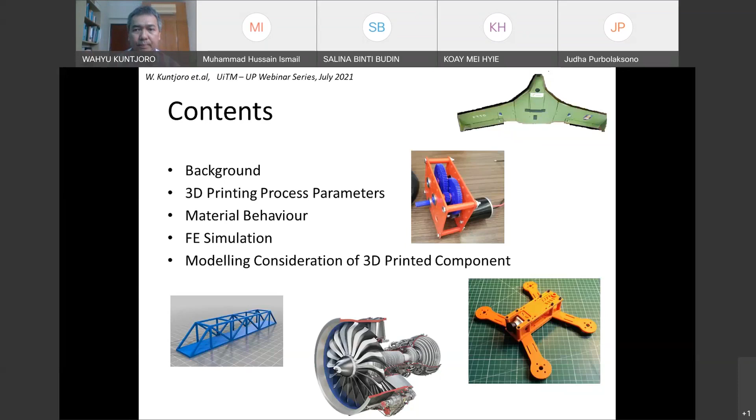Okay, so our background is aerospace engineering. FTTC does aeronautical and aerospace engineering, meaning mostly what we do is airplanes, drones, or multi-rotors. In this case, we are going to focus more on the fixed wing, because that's what we mainly use this 3D printing for. If we look at this picture on the right here, that was around 10 years ago when we built an airplane with a 5-meter wingspan.

The unique thing is that this airplane was powered by a fuel cell. The problem is, at that time, the power to weight ratio of this fuel cell was very poor. Meaning we don't have much power and the fuel cell is heavy. That means we need to generate enough lift or vertical force upward so that the airplane can fly, but of course the airplane has to be lightweight.

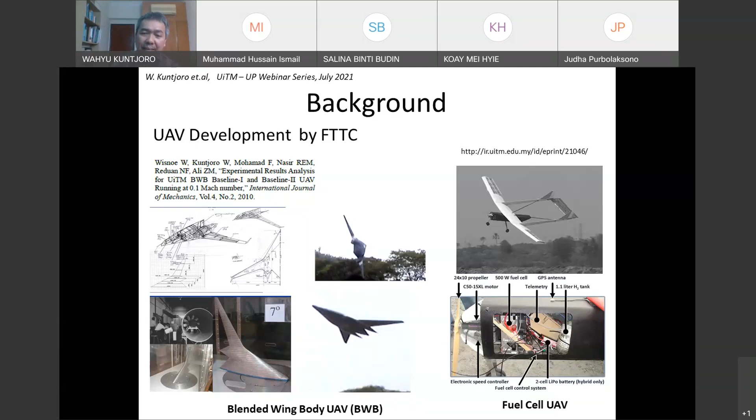For comparison, when we design and build a small airplane like this, meaning the wingspan is less than 1.5 meters, I'd say this comes under the category of micro, or small mini UAV, then it is simple. This is made of balsa, a very conventional airplane, easy to design, easy to build, easy to calculate. So just for comparison, balsa is okay for this kind of airplane.

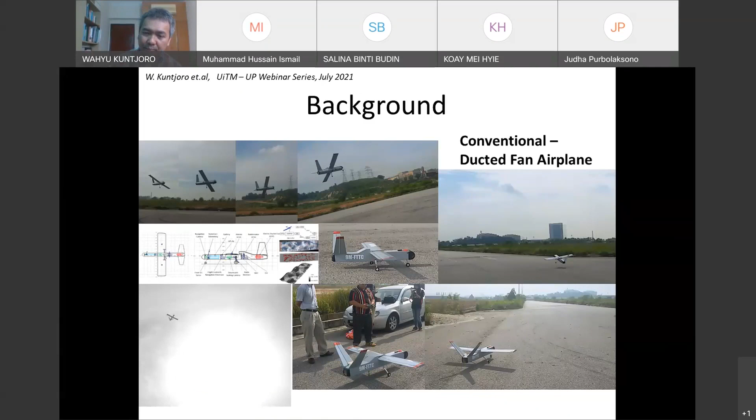Okay, so now this is another story. This is, I think, around 8 or 9 years ago. Everybody in Malaysia is definitely going to be familiar with PRGS, so this is making use of a PRGS grant. We built the prototype of a blended wing body airplane, tailless without tail, and with canard. We wanted to manipulate the flight dynamics and control by using the canard. That was the intention at that time.

Mind you, this is 8 years ago. So we built this airplane, and the problem again is how are we going to build it. This airplane is about 2.5 meter wingspan, meaning the length from wingtip on the left to wingtip on the right is about 2.5 meters. Why didn't we want to use balsa? Because this is a prototype, and it will take a lot of punishment. Definitely it would fall down, incidents happened, and indeed that happened. So we need a frame that is robust and can take punishment. Balsa couldn't do that.

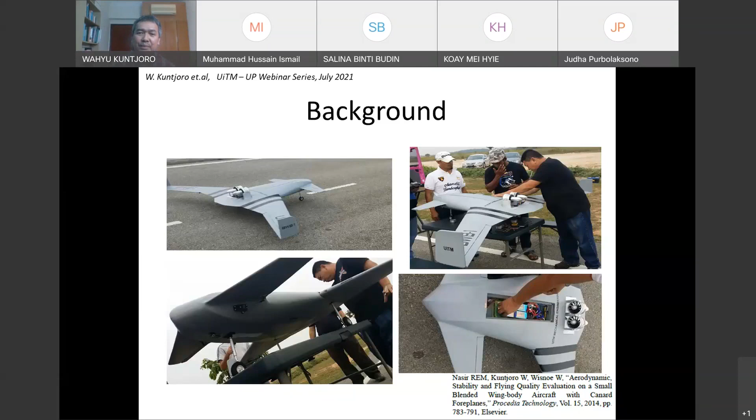So again, we have the challenge: how are we going to build the prototype to our design, which is going to be okay, but not so expensive? By the way, we did a lot of manipulation to our blended wing body.

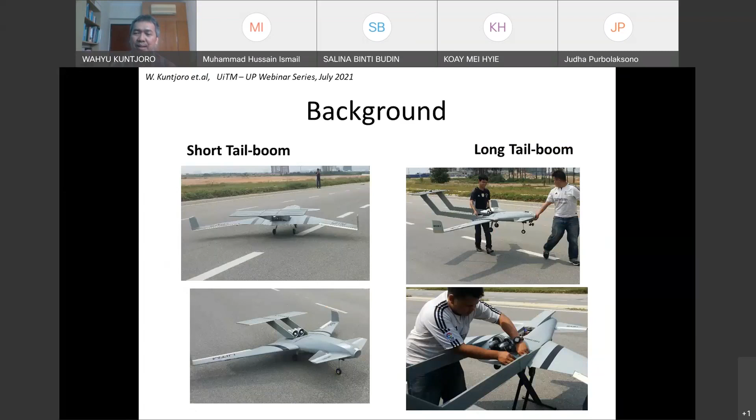Probably it's not so clear to you just by looking at this picture, but only the body and the wing are made of composite. When we add additional components such as the horizontal tail or the tail boom - this long beam is the tail boom, this is a short tail boom - it is made of balsa in combination with a carbon rod. So this is a kind of mixture of various manufacturing processes.

It was flying a long time ago. So from here we could see that we were evolving in terms of material that we can use for micro or small mini UAVs.

Meaning that it is going to be below 1 meter, 1.2 meter, 1.5 meter, probably not more than that, then balsa is okay because relatively it is going to be robust for that size. But when we go beyond that, like 2.5 meter, 3 meter, or beyond, balsa is not going to be effective anymore. So that is also part of the reason why we make use of carbon fiber reinforced plastic.

So we start with wood, balsa, and then we use carbon fiber, which is expensive, as I mentioned before. By the way, it is not easy to get carbon fiber prepreg which is up to the standard for this purpose. So again, the challenge is it's expensive and we need strength and stiffness. Also manufacturing cost is expensive. So it's always going to be a balance between cost and strength.

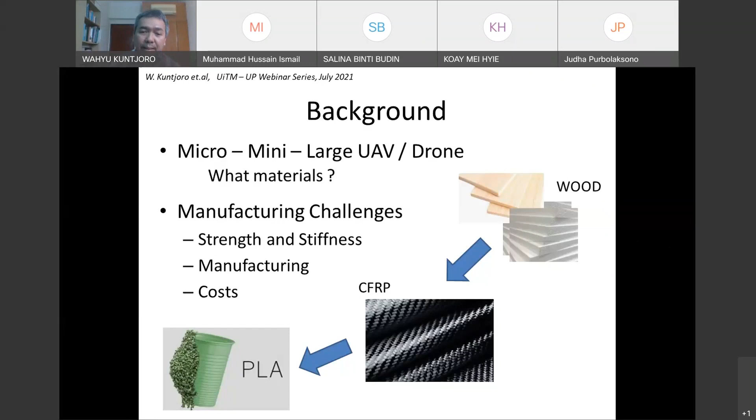That's the reason why, beginning from 3 years ago, we began to look at 3D printing. The material that we are working with in our 3D printing is PLA, polylactic acid, not for any special reason, but because this is easy to get. It is easy to get, relatively cheap, and not too bad basically.

So what you see here, I think this picture is about 2 years ago, a few small UAVs that we built using 3D printing. By the way, this gentleman standing there is the head of FTTC, Dr. Rizal Effendi. He's holding an airplane that is made of 3D printing, and all these airplanes that you see there are made of 3D printing.

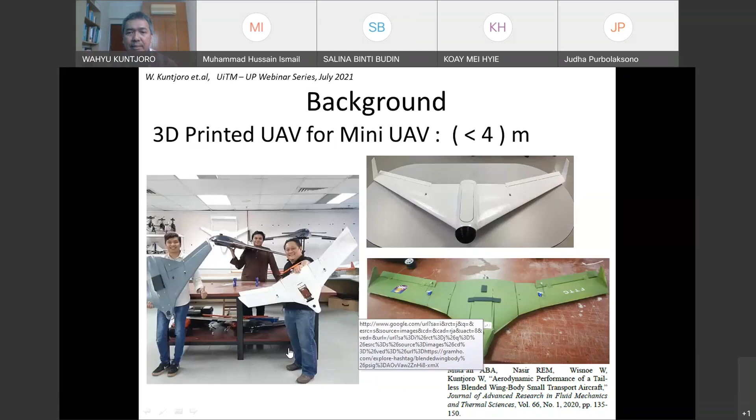And we like it because it can produce complicated shapes, which we need, especially when we are dealing with an airplane such as this blended wing body airplane. Okay, so those are the backgrounds. So now let's look at the 3D printer itself.

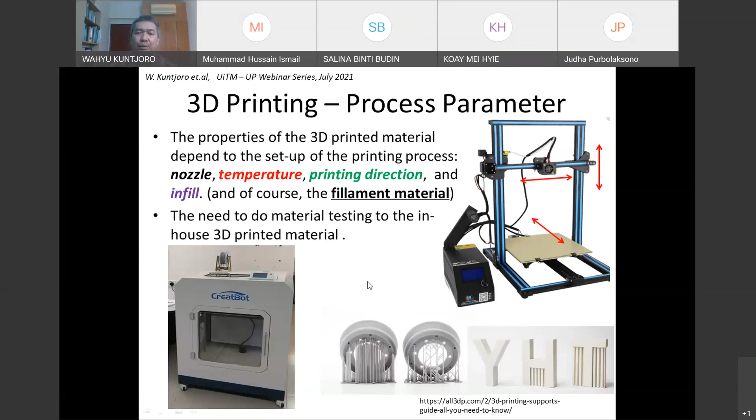We cannot just simply go to a website or look at a journal or articles for the mechanical properties of the printed component. No, because the range is too big and it's not going to be the same. So we need to do material testing on the in-house 3D printed material.

So this here is what we mentioned as infill. If it is 100% solid, that's what you have over there. But if it's 10% infill, that's what you have inside. 30% is more dense, 70% is even denser, and 100%, theoretically, is fully solid. So that is the difference between infill.

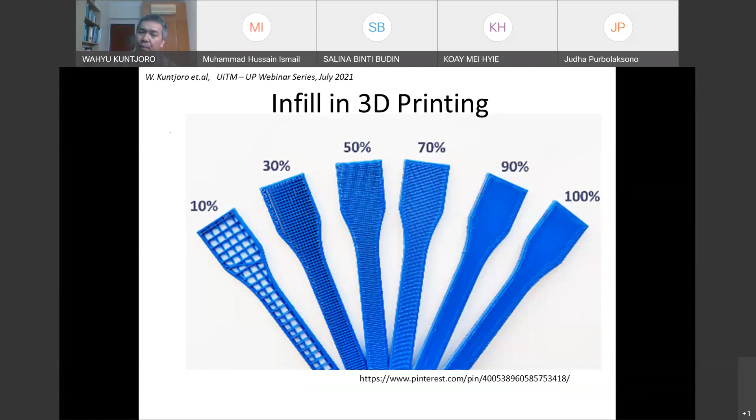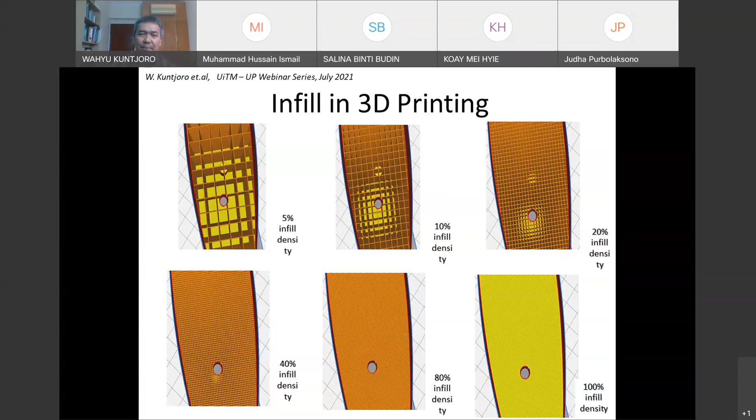We have to take this into account when doing analysis. Here we have different infill from 5% to 100% infill density for the same infill pattern. So actually, when we have 3D printing, inside it is not solid - even a thin plate inside is not solid. And there's also various possibility of patterns, infill patterns, with the same infill percentage.

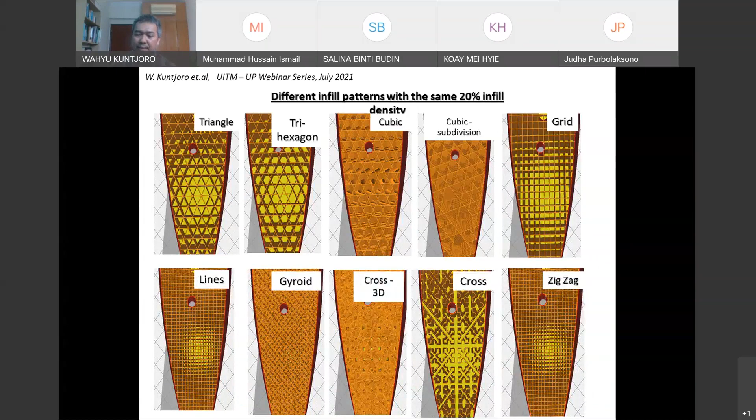So what we have here is an article from Caminero. Here we see the different tensile behavior when we print in a different approach, whether we print transverse vertically, or longitudinally flat, or longitudinally on edge. If you look at these three, the stress strain diagrams are not the same - that depends on the way the printing direction was conducted.

Here it's not more than 40 megapascal. But when we have on-edge printing, it comes to 70 megapascal, almost twice. That means we have to be careful with this situation.

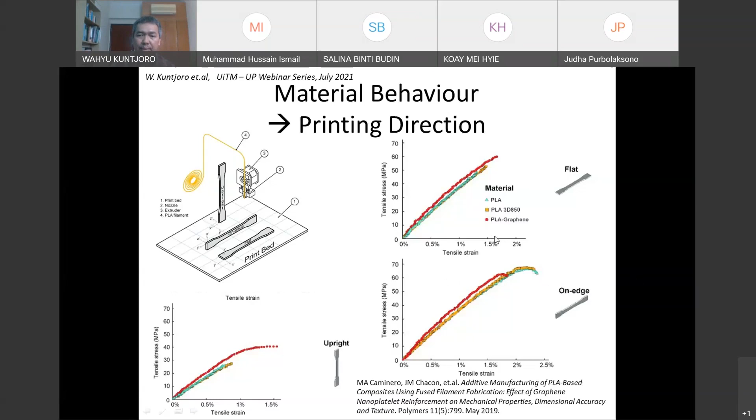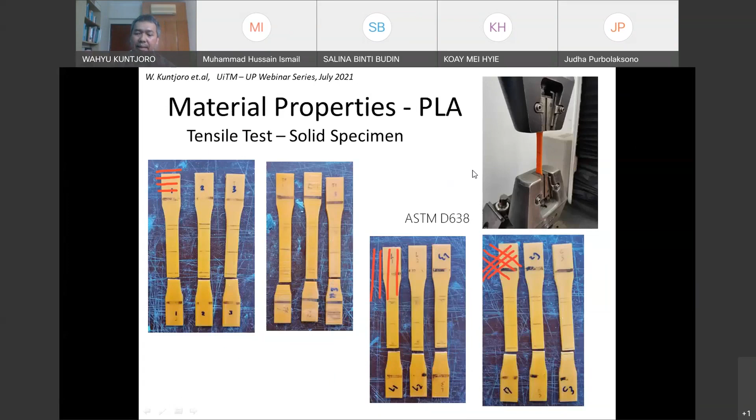In fact, we also did our own testing using ASTM D638, and again we see that it is not the same. So for different printing directions, we have different values of ultimate strength, and it is not the same as reported in the article. For example, we have 48.5 megapascal for this cross direction, and 29.8 megapascal for transverse vertical direction. That's quite a big difference.

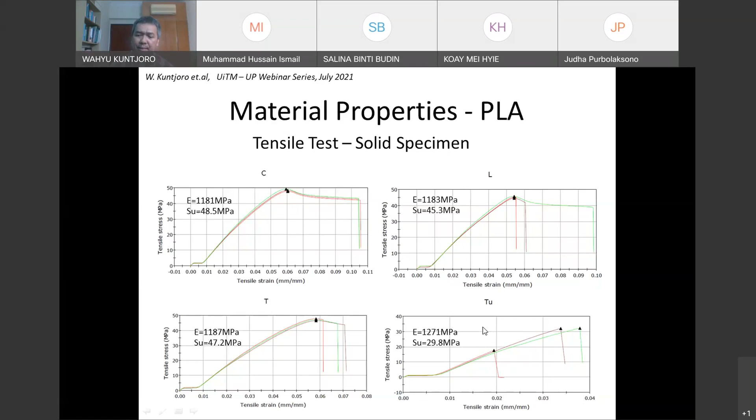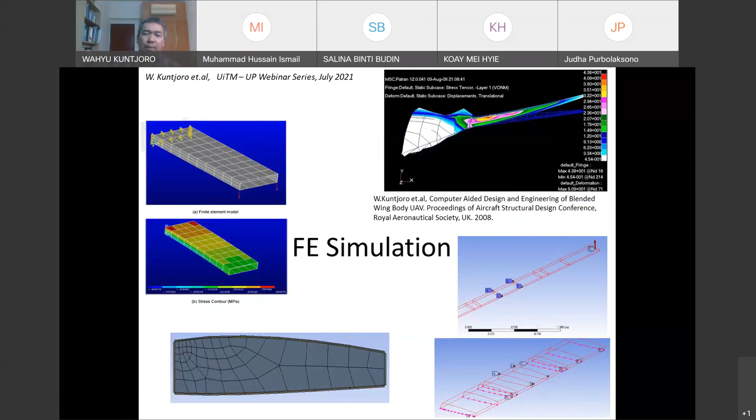Now let's go to what we've been doing in terms of FE simulation. Based on that, when we build FE simulation we make use of mechanical properties based on the way we print the component. This is basically what we did two years ago - we wanted to check whether our simulation would be validated by testing.

We have a very simple test here, a hollow box simulating the wing box, and the displacement measurement is very accurate - the simulation of displacement is basically the same as the test, but the stress has a 20 to 30% difference. That means we need to investigate the reason for this gap at certain points, which we measure using strain gauge.

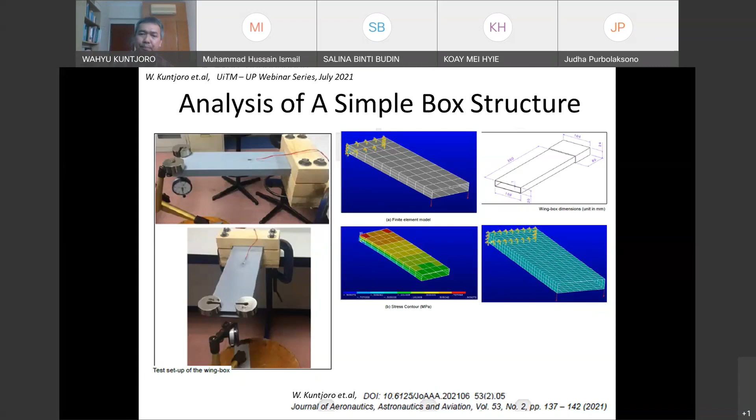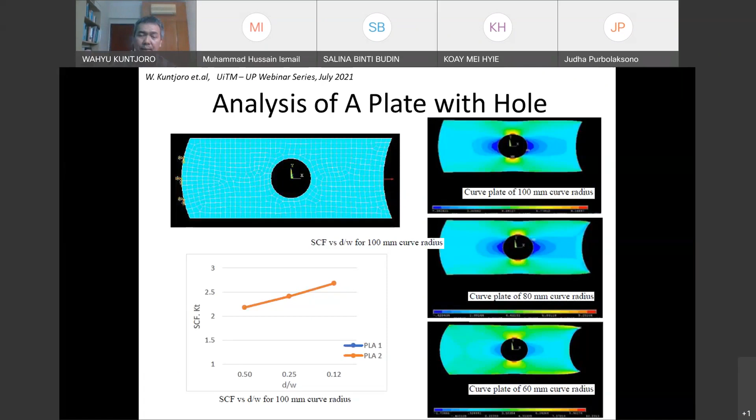Another analysis we've been doing is a curved plate with a hole. The reason is because we have a similar component in our airplanes, so we need to understand the behavior, the stress concentration factor, for example.

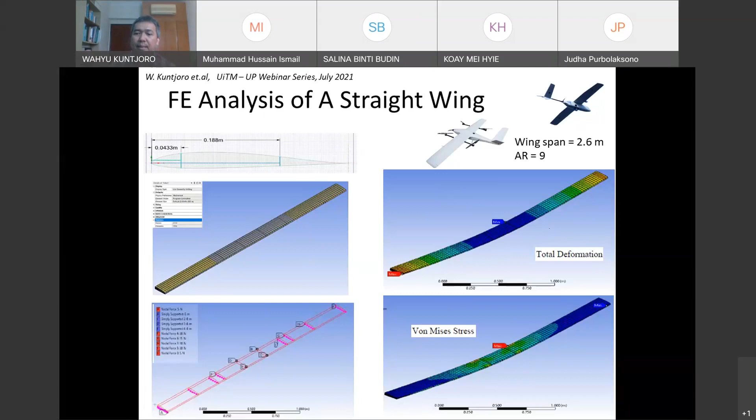We also do investigations on wing joints and assembly. Our printer can only produce a specimen, assembly, or component up to 30 centimeters long, but the length of the wing for this airplane is 2.6 meters, meaning we need to print sub-assemblies and sub-components and then do assembly. What we have been doing so far is bonding, but we need to know if we can do assembly by joints.

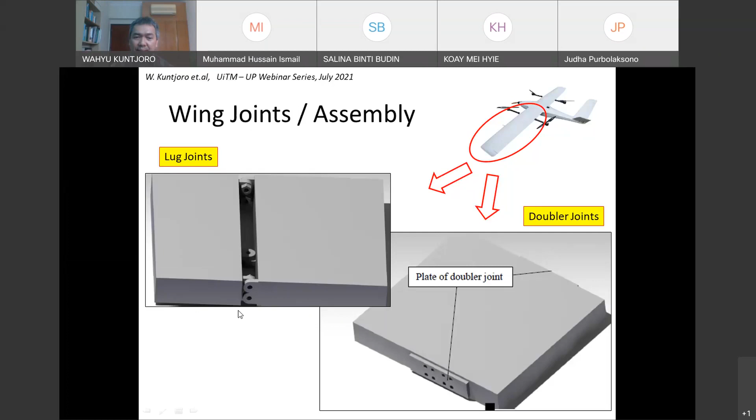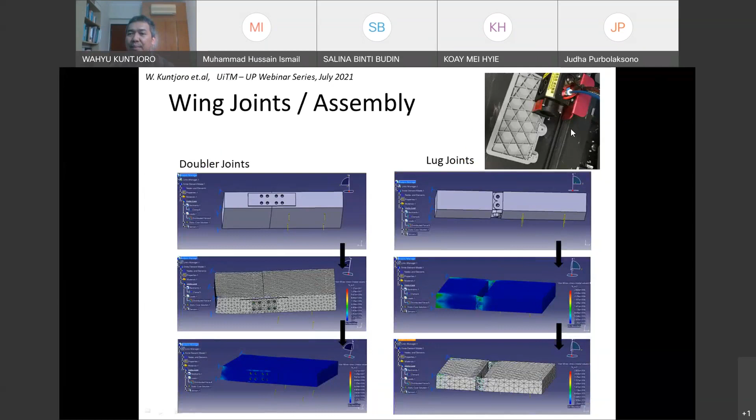Okay, so now we are at the end of our chapter. Based on what I've been sharing, it should be clear that we cannot look at this printed component as isotropic - no way, because it is not. The stiffness and modulus of elasticity are probably almost isotropic, but not purely isotropic. From a strength point of view, it is not isotropic. So we need to be careful when we design and analyze it, and foresee what kind of loading is going to act.

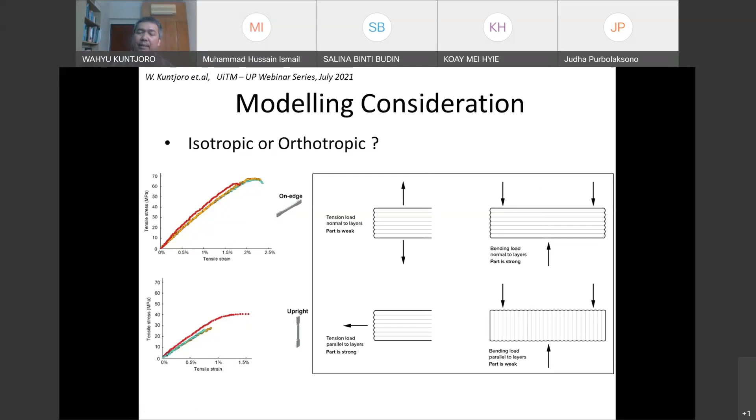On the right here is layer direction versus loading. This is going to be not good. This is going to be good. This is also going to be good. This is going to be bad. So that is tailoring the printing direction and layering to the actual loading itself.

Okay, so that ends my presentation. Hopefully it's not too long.

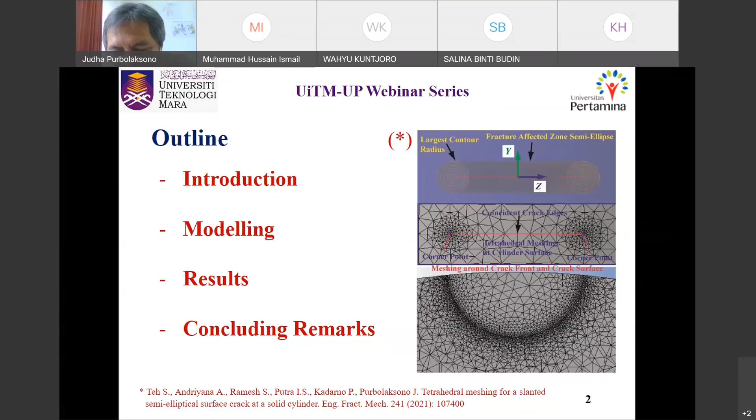So we know there are quite famous numerical techniques. The first one, with wider application, is the finite element method, and the second one is the boundary element method.

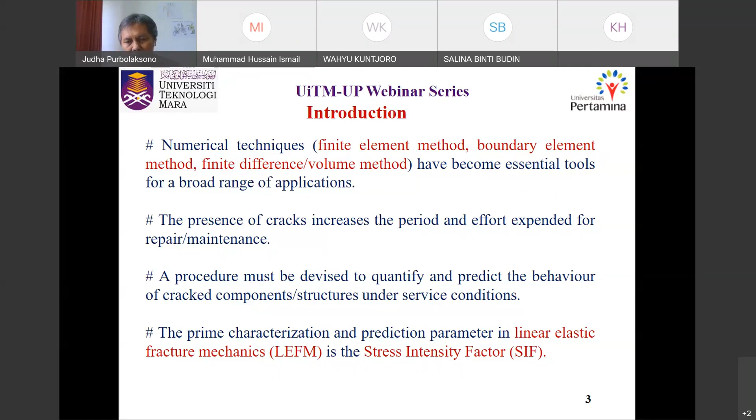Okay, so today our presentation will focus on what we call the cracked solid cylinder. Basically, we know that round bars or shafts are widely used in various applications, in engineering components.

Then of course, when we are facing a crack problem, we should carefully analyze the problem in detail. Basically, cracks or flaws or defects are usually initiated in a component, usually due to material defects.

Or probably during the handling, sending of the material, or locating the component, probably in a storage warehouse, and also improper manufacturing processes.

So basically, there is a need for proper investigation. Then with the help of numerical analysis, we can probably analyze crack problems or crack components in a proper way.

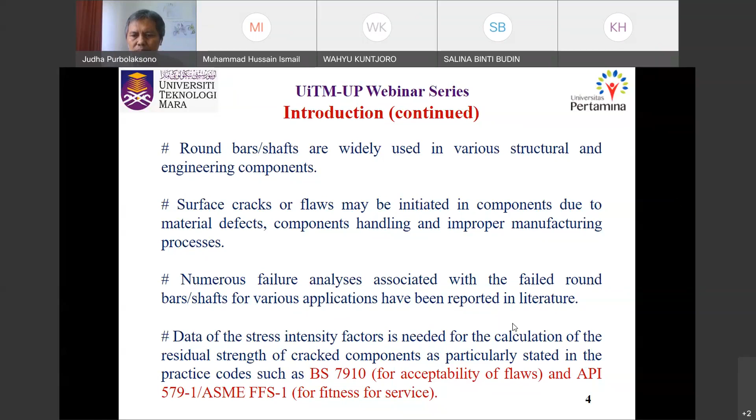With the help of computer development, especially in computer graphics, I think we can feature the crack region in more detail. This is going to be very helpful to us, especially as the analyst, engineer, or designer. The interactivity of computer graphics is going to be very useful in analyzing crack problems.

Nowadays there are many finite element software packages available in the market, such as ANSYS, Abaqus, Hypermesh, MSC Nastran, COMSOL, etc. There are many options available.

Here, the results for stress intensity factor reported in literature are mostly solutions for a larger ratio of crack depth to cylinder diameter. Only very few papers present results for a relatively small ratio of crack depth to cylinder diameter.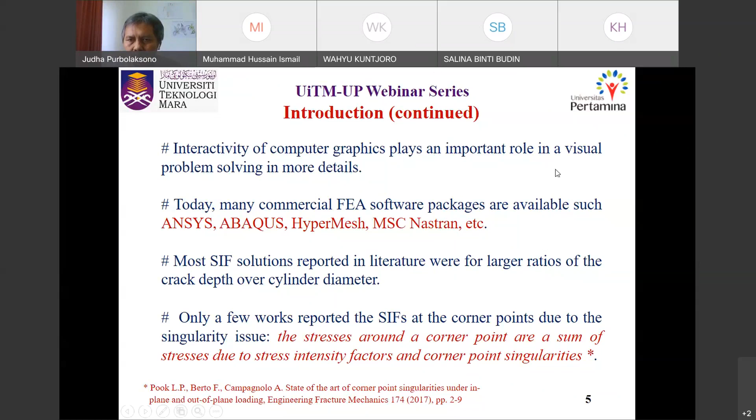Here is the most common stress intensity factor solution reported in literature, for larger ratios, as already mentioned earlier.

With nowadays advancement in computational development, it's going to make it possible for developing a model for small surface cracks. This is of interest because if we are doing damage tolerant analysis, we will have many scenarios.

Usually we need to initially introduce a relatively small crack. In aircraft structure, for example in the wing section, we usually have guidance from EASA, the European aviation body, or FAA, the aviation body from the US. They typically state the requirement to have an initial crack, for example a through-thickness crack, surface crack, or corner crack, and usually it's relatively small, such as 0.005 inch.

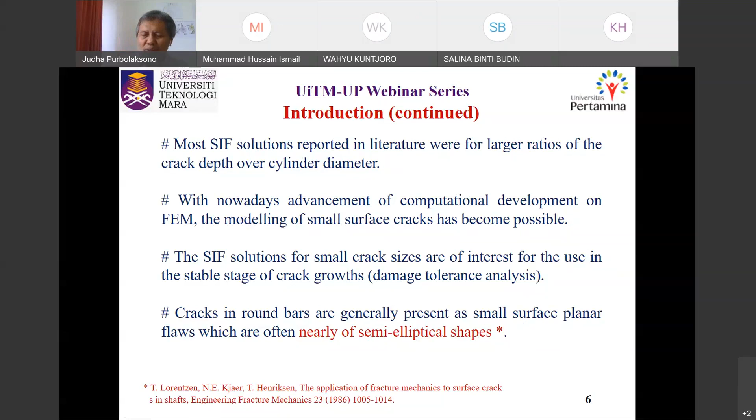In the literature, for cracks on a round bar, this has been reported in a number of papers, and the shape of the surface crack is nearly semi-elliptical. Even when doing experimentation, after introducing an initial crack, the crack tends to have a semi-elliptical shape.

The data for the solution is needed, and only a few papers report results for the stepped bar. In the smooth cylinder there is quite a number, but in terms of modeling, we still need to further explore.

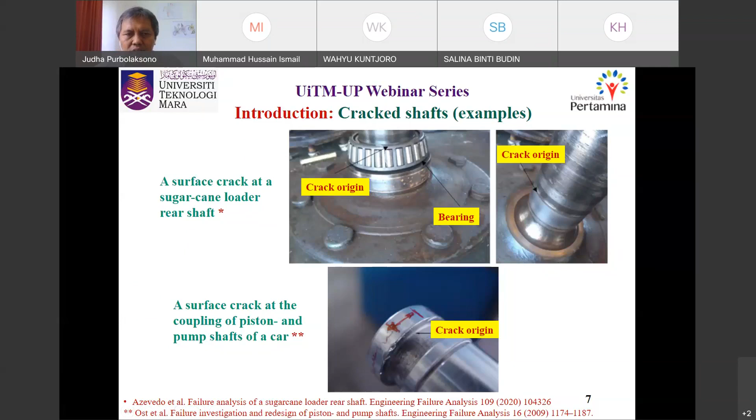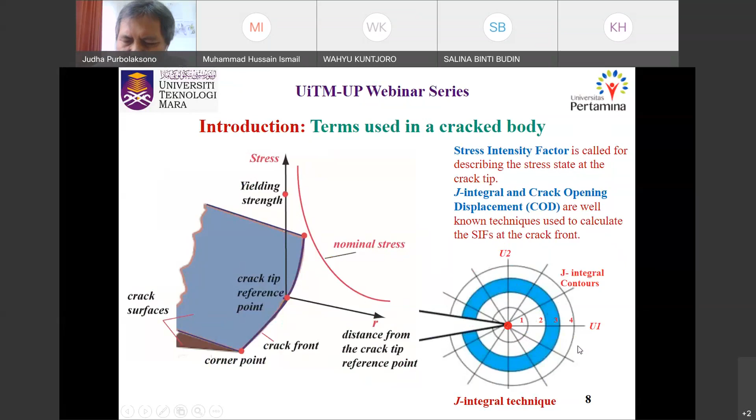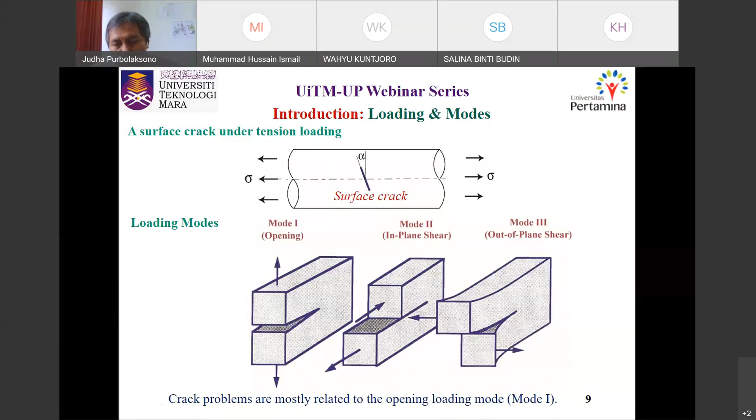In practical application, the opening mode or mode 1 stress intensity factor is mostly used, since mode 1 is more likely to happen. That's why in many analyses people focus on using the data from mode 1. But now there's a lot of research going on considering the mixed mode as well, in terms of calculating the SIF or doing fatigue rate analysis.

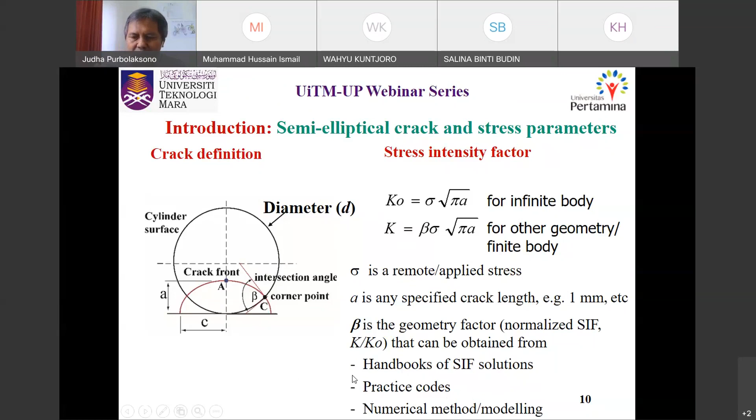stress intensity factor. Usually this data is available in the handbook, and also in practice codes like API or BS or ASME code. And I think here we can use numerical modeling by using finite element or boundary element method. So what we are doing, what we have done actually was...

using ANSYS, basically ANSYS workbench. That one is ANSYS 2019 version. So we call it 2019, we remember COVID-19. So that one also is not a good thing.

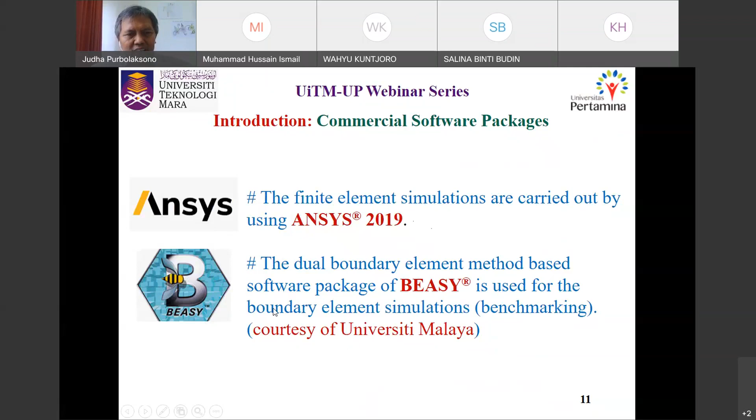And the other one is we were using BEASY software, basically a dual boundary element method based software package, developed in Southampton, United Kingdom. We have to say thank you to Universiti Malaya because they have the software, and this is for benchmarking purposes.

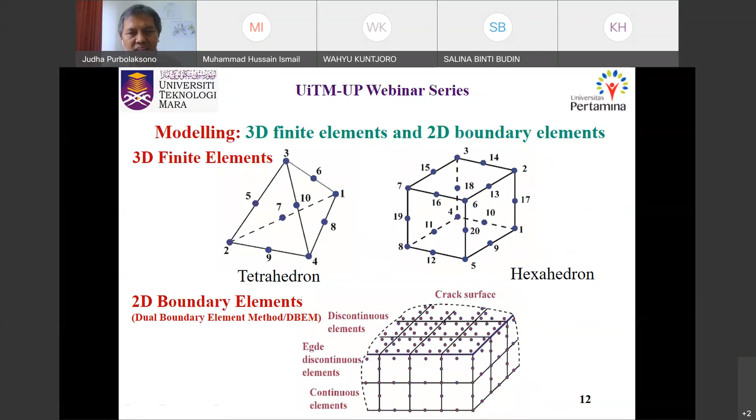So basically we try to introduce ultra fine meshing around the crack region. So here is shown the meshing strategy. In the smooth cylinder, as I mentioned earlier, we have the largest contour radius, and also the fracture effective zone, usually a mid semi-ellipse. So basically we can see the difference between the hexahedron and also the tetrahedron.

After we generate meshing, here is the appearance. We see the corner point, around the corner point, something like that. Actually the one here is along the crack front over here. But here is the section view, something like this - this one for tetrahedron, and here for hexahedron.

Based on empirical exercise, we propose or suggest to recommend the user to use a probability around 0.25 until 0.5 A, where A is basically the crack depth here. So far so good, when we choose either one here, but of course we can also make it smaller than this, or larger than this.

So if we would like to have a rough calculation, for example, then of course we need to use a larger size, for example equal to A or probably 0.75. And of course, the runtime can be shorter.

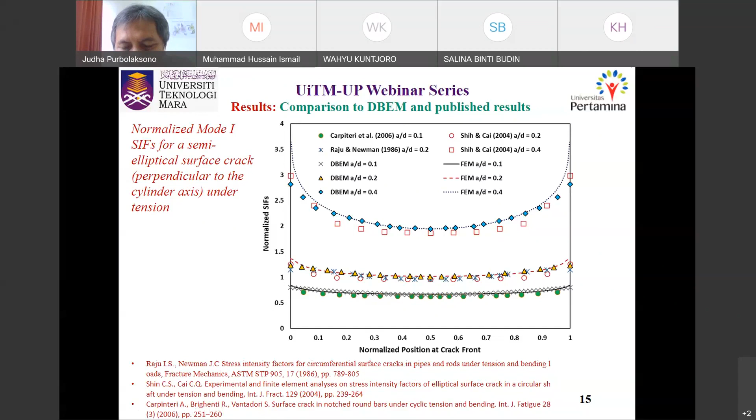But for practical application, engineers prefer to use finite element methods because of the availability of software in the market, and also the running time can be much shorter than using dual boundary element. So people tend to prefer finite element methods rather than dual boundary element, also because in terms of formulation, the matrix resulting from dual boundary element is very dense.

My PhD thesis was using the dual boundary element method, developing code for large deformation problems in rational plates. The project was under sponsorship, and that one is related to the project.

The project was for the Airbus A400M, the military version. That aircraft had its maiden flight in 2009. But that work was for flat plate. After that, there was much development with shell shapes and also with multi-connecting bodies.

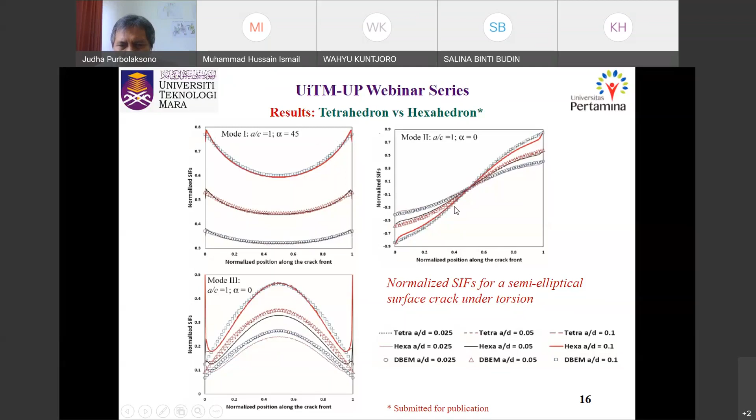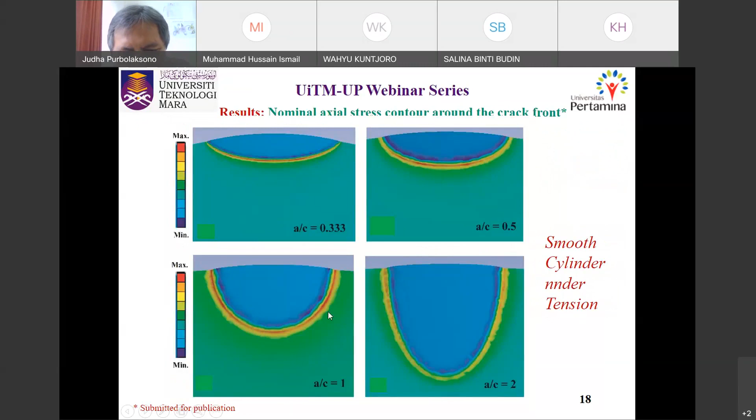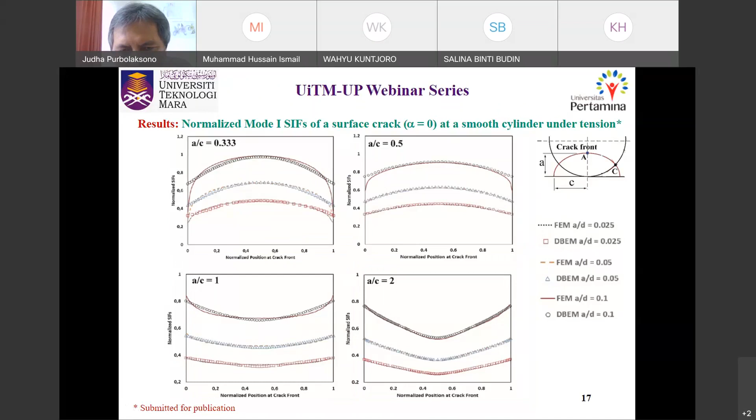In the case A over C equal to 1, the red contour is going to be almost evenly distributed. We can see this one is slightly, but obviously larger. But if we look at the effect, for example later in the step bar, we can have a different result.

Here is the result for the step cylinder. It's similar, we can see there is some transition, from concave to convex shape. If we look at something here, we can also feel the stress distribution around the crack region follows a similar explanation, but we can see a difference, here it looks a little bit flat like this.

But of course this is for smaller crack aspect ratio. So actually the result is shifting, meaning the stress at the corner point singularity, we still have a problem for smaller crack aspect ratio. But for larger, I think it's going to have better agreement. But of course, at the corner, we still have the corner point singularity.

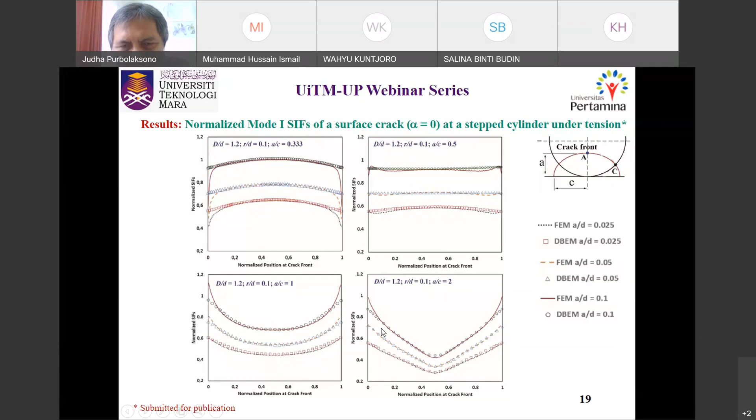We can see over here it's quite similar like this. This result is from, I think, the step bar.

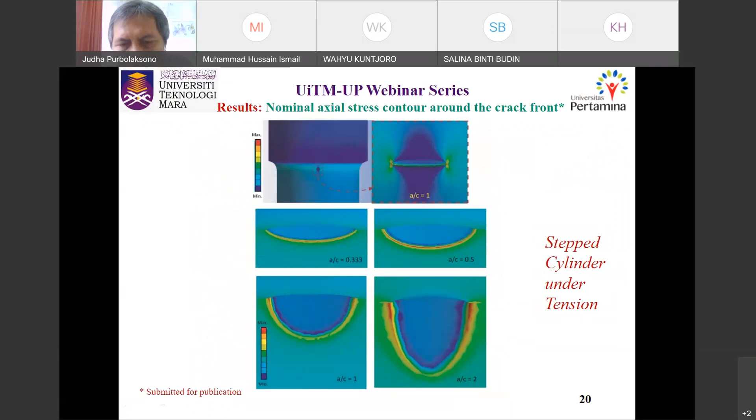I think we can further explore, for example, in the piping system, probably in the pressure vessel. So I think we can still further explore the application and use of the tetrahedron, or probably also the hexahedron element, without using special elements.

But here is the nominal stress, I think it's similar to the previous one, only different crack aspect ratio. This has been published recently in Engineering Fracture Mechanics, so that's just to share.

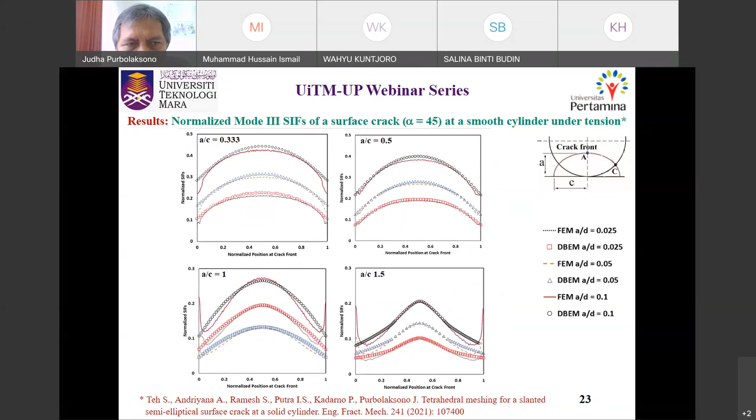That one is in mode 3, we still have a problem. We can notice here, especially at the corner point, we have some deviation here.

That's why for future work we probably need to use a higher order tetrahedron element, probably using 20 or 32 nodes, for example. Then probably we can treat the corner point problem more accurately or conveniently.

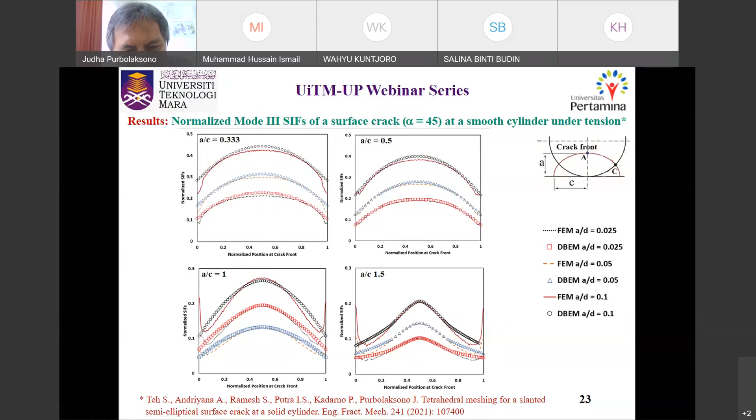Okay, here is the concluding remark. So basically we can see over here, for small crack, and also for larger A over C, then for mode 1, and also for mode 2, for A over C less than or equal to 1.

So basically, the results by FEA were found to be in good agreement with those by dual boundary element method. Then we have shown, I think, before that mode 3, or tearing mode, out of plane, needs further treatment because there is still a problem with the corner point singularity.

The SIF, especially for mode 1 and mode 3, away from the corner point, generally the results by FEA and dual boundary element were found to be in good agreement. We can also notice, for example, the effect of the crack aspect ratio, crack size, diameter, and also loading mode will influence the SIF.

As for the step bar, basically the severity at the corner point is intensifying the effect of the shoulder fillet, causing or resulting in probably stress concentration, especially when D over D1 is large, or R over D is small. So here we have probably the severity of the corner point singularity.

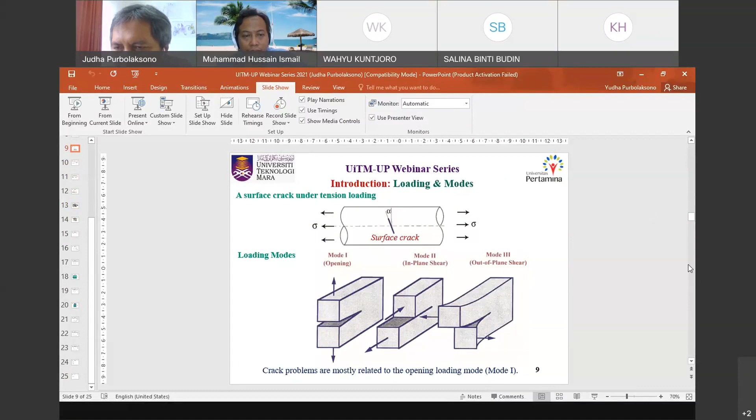So of course here the configuration is pretty simple, I think. So of course the important thing here is we have what we call features in the software, in the ANSYS software, and we know we can play around with the size of the LCR here, the largest contour radius.

So how confident then, from here? So from here, basically we have a good meshing, for example, we are using the tetrahedron. And then of course if we need comparison, the result is probably in good agreement with those by dual boundary element method, because actually dual boundary element method is a more suitable technique to evaluate crack problems. Until today, like Airbus or Boeing are still using dual boundary element, but they just ask to generate a simple model.

They cannot say simulate with the full scale model. The only way is we have to use, for example, if you have a model closer to the real one, then of course we need to use a finite element method.

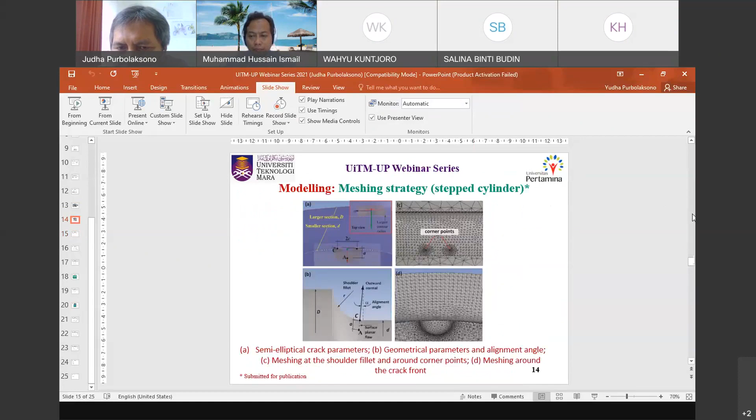Here we can see, if I look over here, this is very fine meshing, or we call it ultra fine meshing. So of course we are quite confident, but we still have a problem on the corner point until today.

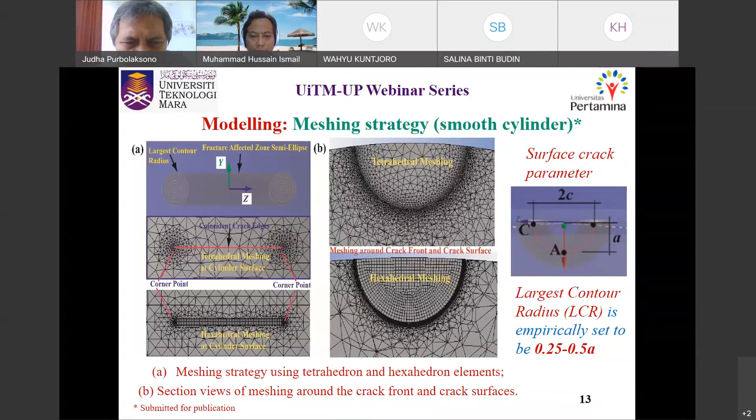There still needs to be further development in dealing with how to estimate the stress intensity factor at the crack tip. But away from the corner point, I think we are already confident enough, and the result is quite promising.

Yeah, corner point. So of course, with the boundary condition, as long as we try to apply the boundary condition as close as possible to the real one. For example, if we have a complex problem, such as a structure made of few components or connecting bodies, then of course we have to be careful in applying the boundary condition.

And of course there's a lot of room still for development, or room for opportunity, I think, to explore other relevant topics, probably for other applications.

But for coding, for example, of course we need to suggest using a higher order of element, because here we just use a 10 node element, but it was already quadratic.

And then, say, in a hexahedron element we use 20 nodes, but it seems the result done using the hexahedron element looks better.

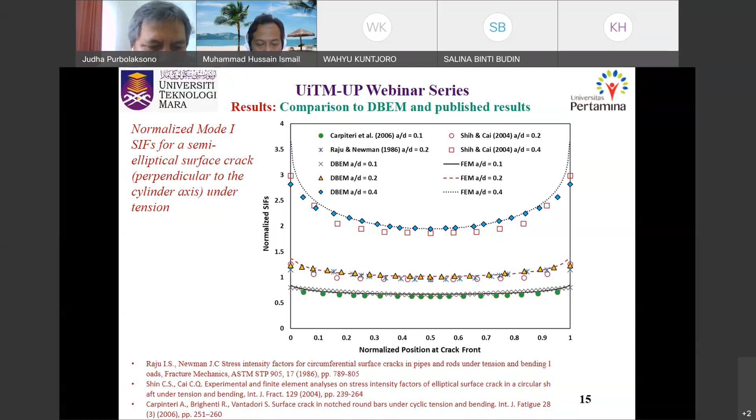So in terms of confidence, we are quite confident, as long as the boundary condition is correct and as long as we know the material properties, for example using orthotropic properties as presented by Prof. Wahyu Kuntjoro. We also have to be careful in defining the contact, layer by layer, and this needs to be taken into consideration. Probably that's my response.

Probably Dr. Hussain would like to have a further question.

As long as that is the result, but actually for fatigue crack growth, basically we can utilize the result away from the corner point, and then we can actually use extrapolation.

Some other researchers, like Carpinteri and others, yeah that's also a new one, I think they are using extrapolation to approximate the SIF path at the corner point. That's the issue with using finite elements, we still have a problem at the corner point. Probably it's also good to explore using a higher order element.

Okay, that's my response, Dr.

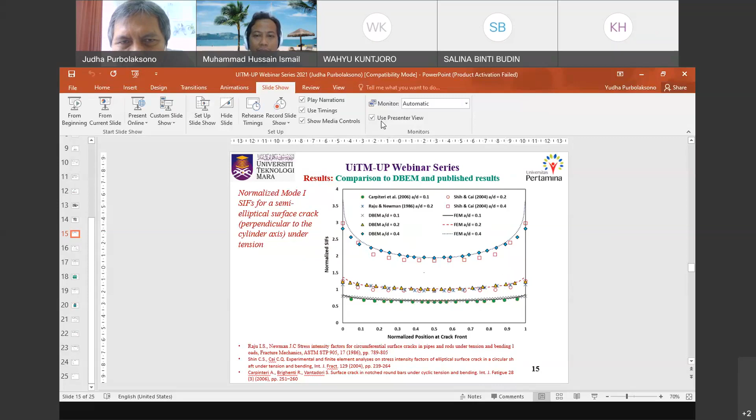Actually, I want to know whether Prof Wahyu is still here or not, because I'm missing one question from a participant. I'm here. Okay, is it okay? Sure, I'm still here. Okay, there's actually one question from Mr. Shazwan Johari, from UiTM Pasir Gudang.

Assalamualaikum everyone. I do have one question. PLA is known for being soft or deformed under high temperature, probably above 60 degrees Celsius. Is there any way to overcome this from happening, or is this problem unavoidable?

Okay, that is a very pertinent question, because that indeed is the problem, as Dr. Hussain is very much aware. The problem with PLA is that it is popular, but now the challenge is what happens if it is being exposed to operation with higher temperature. In fact, PLA is not recommended for operation beyond or higher than 45 degrees centigrade.